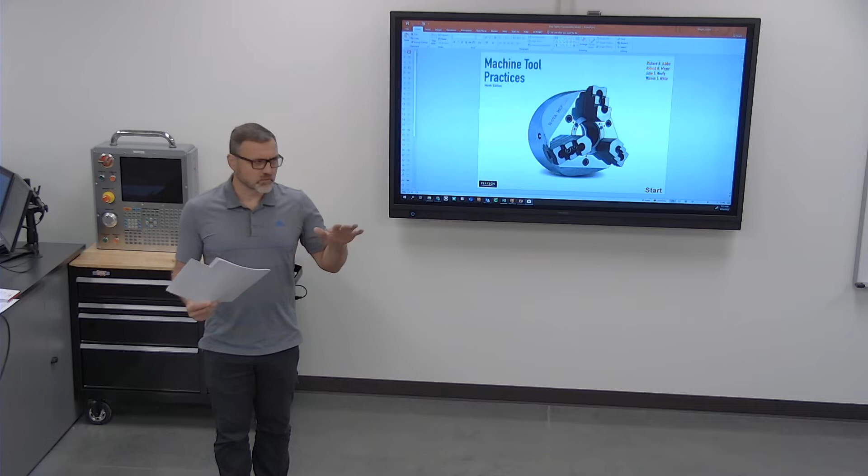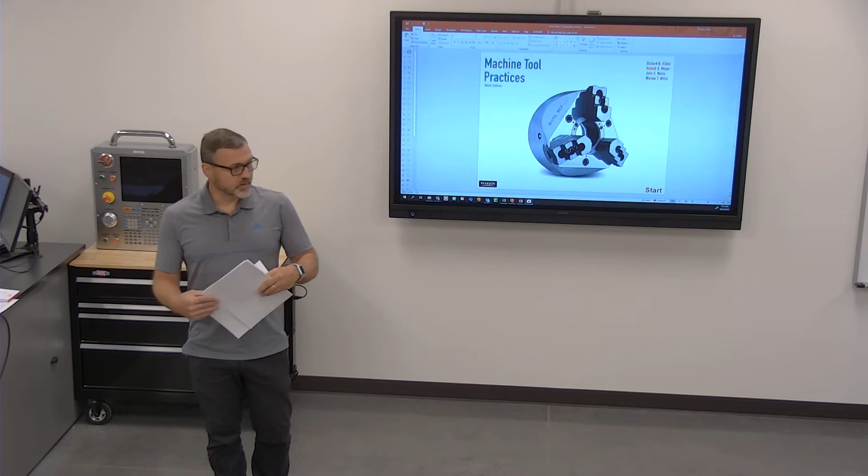We're going to do some safety stuff this morning. This is real general safety stuff. In your modules, your first module, you'll probably see them changing this week as we're doing some tweaking. 101s and 102s look pretty good. 103s and 104s need a little bit of work on them.

So I'm going to set them out here, and before you all walk out to the shop today, we'll go to the shop and start looking at material. Am I the only 103? I don't know. Am I the only 102? I don't know. You guys are.

Who's 102? Yeah, I'm looking at you, Brent. Oh no, you're 101. No, I just realized you say that to every single question. Anything anybody asks, you go 'I don't know.' I could ask, 'what's your name?' and you'd say 'I'm not really sure.' That's not a great life method. At some point that's going to be a problem, like when a cop walks up and asks if you're drunk, and you say 'I don't know.' They'll say great, let's go, get in the car, let's find out.

So 'I don't know' is not always the best answer. Isn't that their job to figure out, though? No, if you just admit to it, you're doing their job for them. I'm in 101. Well, I think everyone else knew that. Yeah, I don't think that was any kind of mystery to anybody.

So I've kind of laid them out, I think 1, 2, 3, and 4 across here. I just made one copy of everything, just one copy of each. So we'll go to the copier and make copies of them. I didn't want to print 10 copies of each one for you.

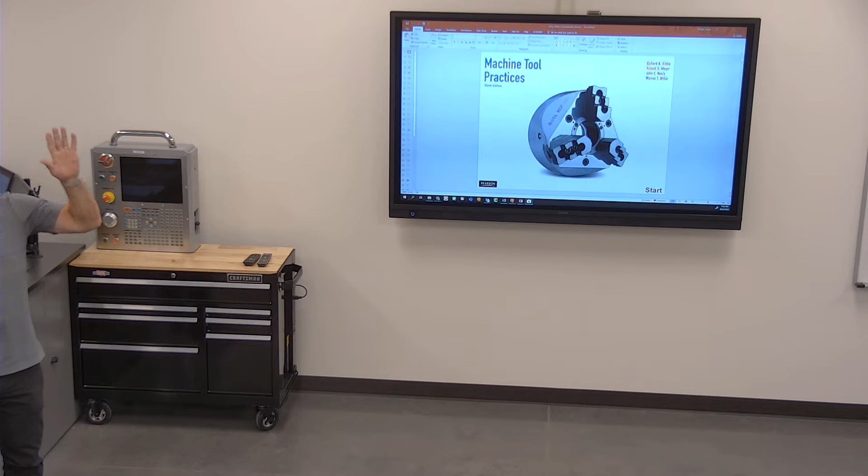Anybody still need a binder? I feel like I said yesterday, hey, after you're done in class, walk down to Fielding. There are 2 giant boxes full of binders. Anybody? I know you don't remember.

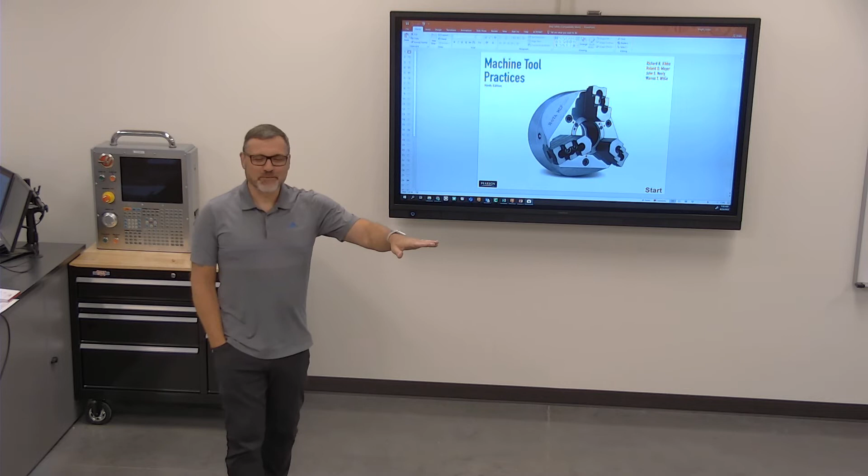I'm going to roll with that one for a while. Okay, who needs a binder? Yes, binder. Why'd you got one? Okay, binder, yeah that's right, you got one. You need a binder. Okay, you need a binder.

Okay, I want you two to walk down to the 3rd classroom. I went ahead and anticipated y'all, so I walked down to Fielding myself and got the 2 boxes of binders. Go get the most ugly, pink, flowery binder that you can. Don't come back with a white one or a black one. This thing needs to have flowers or Smurfs on it. I don't even know what a Smurf is.

So okay, everybody else has a binder. Yep, look at you go. You're going to print your prints out today. We'll go to the copy machine, print the prints out, and 3-hole punch them so you've got them. If you want to make 2 copies, totally fine. Like I said, this isn't all the prints, but these are the prints we need to get started.

So other than that, we'll start going through some safety stuff. We are videoing today. I will have a safety test, a general knowledge safety test for you by the end of the day, by the end of like 5 o'clock today. I'll have that for you in Canvas. First module, it'll say something like safety test or general safety. It'll be the slides that we went over today and then the safety test.

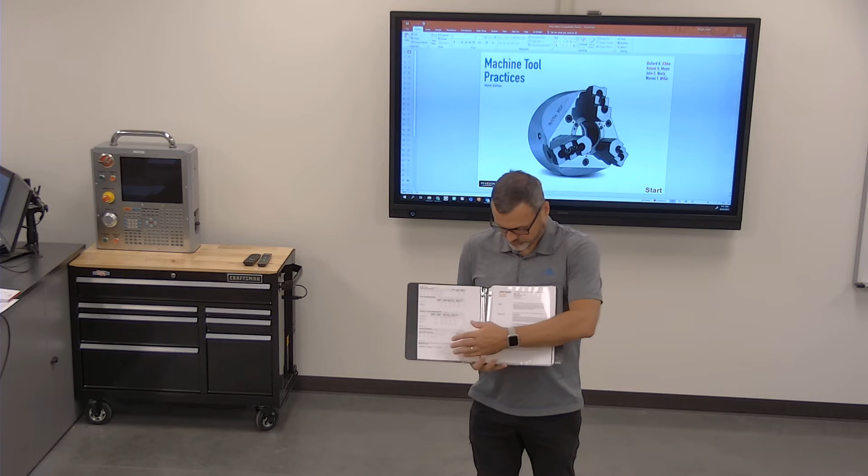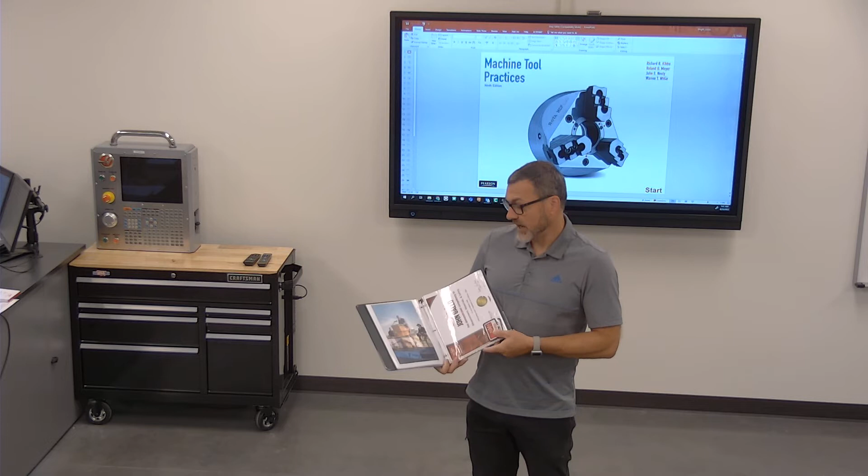John is the model citizen here, check it out. Unofficial transcript, resume - it's like he listened to everything I said. Certifications, that's a great picture. John at the groundbreaking, yeah groundbreaking. NIMS certifications, and then what they are behind them.

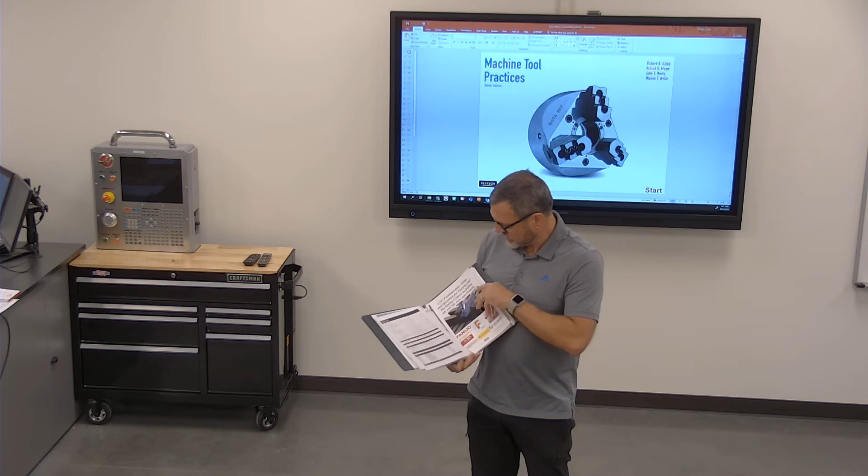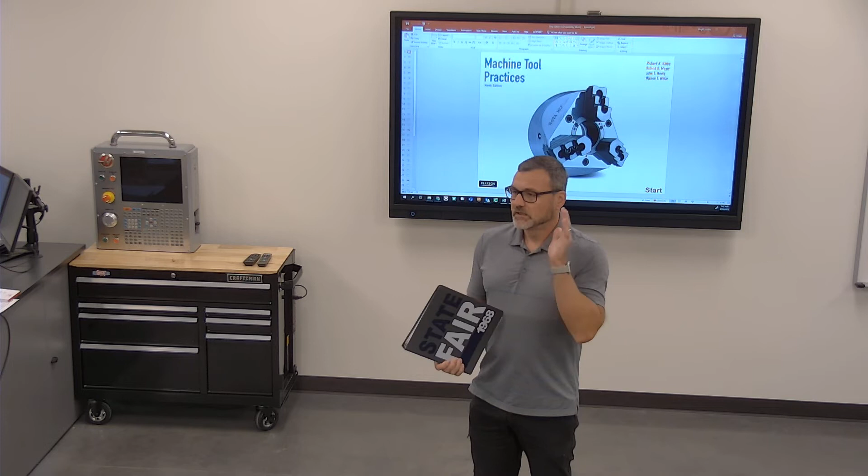NC3 certifications, and then his book and information stuff - things that he needs, things that are vital. Part prints, information, notes. See how prepared that is, so that when you go out to the shop, you're like, hey, we're going to work on part 7943862.

And he just pulls up that print, good to go. Awesome. And then if you need a print, and if you need some of those little envelope things, those little clear things, I think I have some of those. You're welcome to use those if you want to.

Let me make sure that I have them, I don't have them here, I have some somewhere. If you need to 3-hole punch them now, that's totally fine to do, and then we'll get the other stuff done as we go. That's great, and not all that stuff has to be done today, but it's something that you want to start thinking about - how do I get this stuff in here so that it looks good?

Today we will be out in the shop. We're at least going to start getting some stuff sawed, ready to saw. We'll go through some saw safety and some things like that. So let's go and start going through some safety things.

Yeah, that's awesome. So what they're gonna want is a handful of us to go over there, and they want us to evaluate their toolboxes. It's a great opportunity to go over there - we've got their toolboxes over here, and he said, man, I'd love a little bit of student feedback. So they're gonna have some boxes set up, I think. Hey, I love the way the drawer works, I hate the way it locks, whatever - don't be afraid to give them pros and cons on stuff like that.

So if you're interested in that before you leave today, we'll go over there between 9 and 10. We'll probably let class out early that day. If you don't go, then I can't be in 2 places, and I need to go over there with them. I need about a half dozen of you guys, and then we'll go through, do some evaluations on toolboxes, and then I think they'll do a quick tour with you guys through there.

Stanley Black & Decker is one of our apprenticeship partners. Not only are they a great donor to us, but they're an apprenticeship partner, which means if you get connected with them in the apprenticeship, like John is in an apprenticeship with MACH101. I was over there the other day.

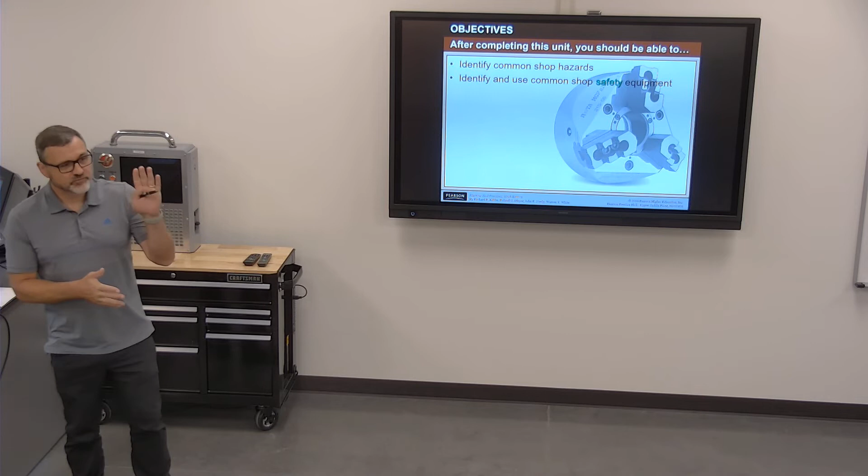So one of the things that can be a shop hazard is a lot of the chemicals and stuff that we have out in the shop. Does anybody know how you find out what is a dangerous chemical or not, or maybe something you're allergic to? Hunter, you might be allergic to bronze. Material safety data sheet, yeah.

So it's actually not called a material safety data sheet, or MSDS, like it was always called before. It's now just called an SDS, safety data sheet. It was a material safety data sheet for a really long time.

We have a flammables cabinet on the back side of the horizontal mill, you can't see it from here. On the front of it there's a book, and if it's a chemical or material that has anything potentially hazardous to you, it's in that book. So if you're deathly allergic to WD-40, we have all the ingredients of WD-40 in there, so you could figure out why you're getting sick. Anyways, all that stuff is listed.

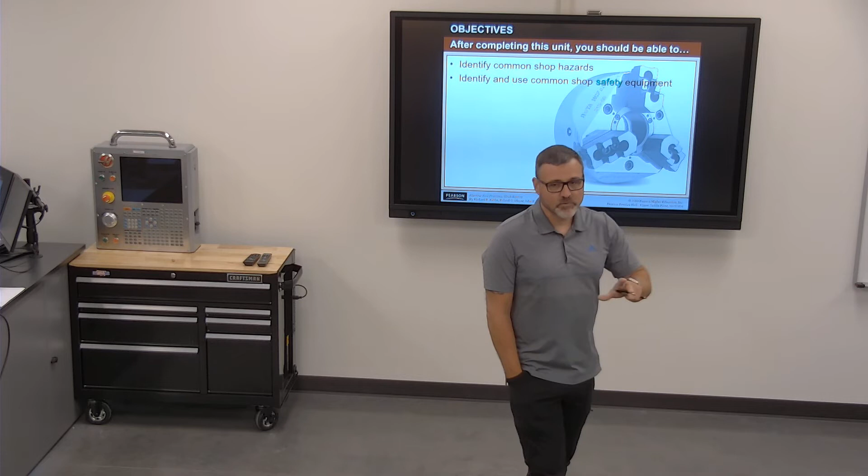If you have a problem, occasionally we'll see somebody get some skin irritation from coolant. Oftentimes that's not actually because of the coolant itself. Typically it happens because the coolant starts to get bad and builds up bacteria, and that bacteria gets on your skin, and that's actually the thing that causes the problems.

We have a couple of new coolant cleaners this year. One is on the mill you see the backside of when you come into the shop, kind of catty-corner from my office. It's got a big tank on the back with a green foam mesh piece. It's a portable coolant cleaner, so you take it off, move it from machine to machine, put the hoses in, and it'll clean your coolant for you while you're running that day.

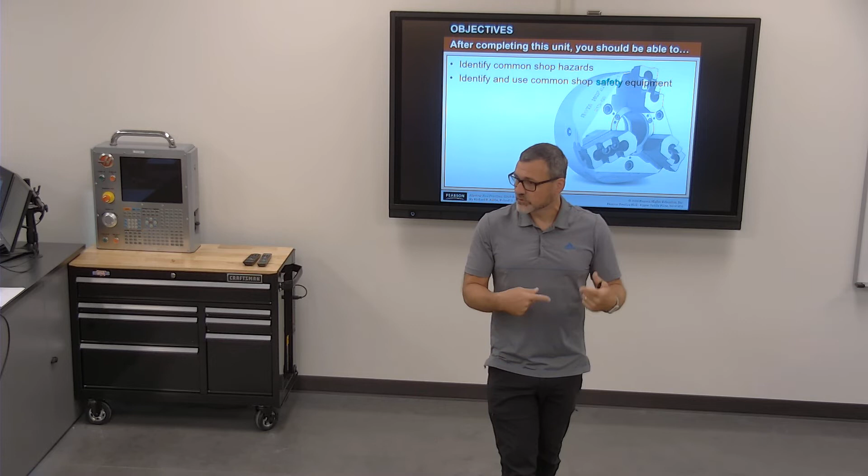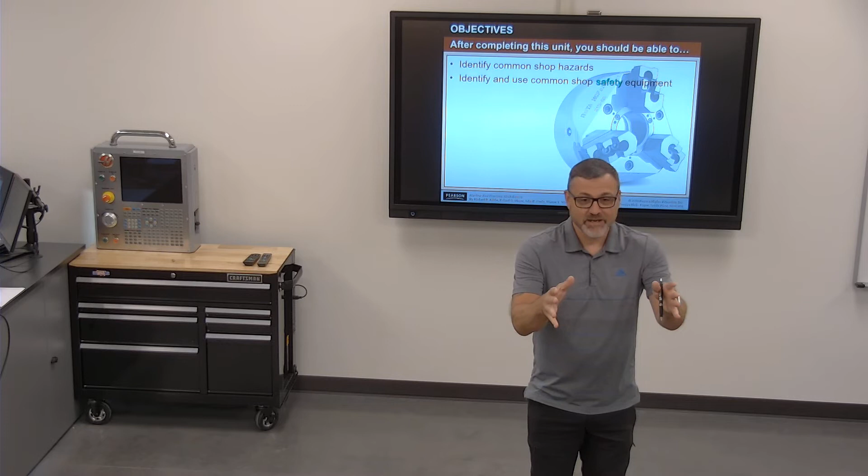A couple things to watch out for: it's magnetized to the back of the machine, and those magnets are insanely strong. Chance, you're going to have to be hanging off the machine to get it off. It's like a black plate - it was like a cartoon when I went to put it up there. I got about four inches from the machine and it pulled it out of my hand and snapped up to the wall. I was like, is there a switch on it? I don't think I can get this thing back off - I'm going to have to buy another one because it's really on there.

It has a clear translucent tank, so before you move it, drain the tank, then you just pick it up. We'll put it on a cart and move it over to the next station. I'm going to have a laminated piece of paper with a magnet or sticky on it that says, clean the coolant of this machine today.

So when we start going out to the CNC machines, whenever I give you one to work on, you might end up on machine 3, and machine 3 might have a sticker that day saying you need to clean the coolant in this machine. On our manual machines it's not so much an issue - we still use coolant from time to time, but it would be coolant straight out of a tank, so it wouldn't be as much of a problem.

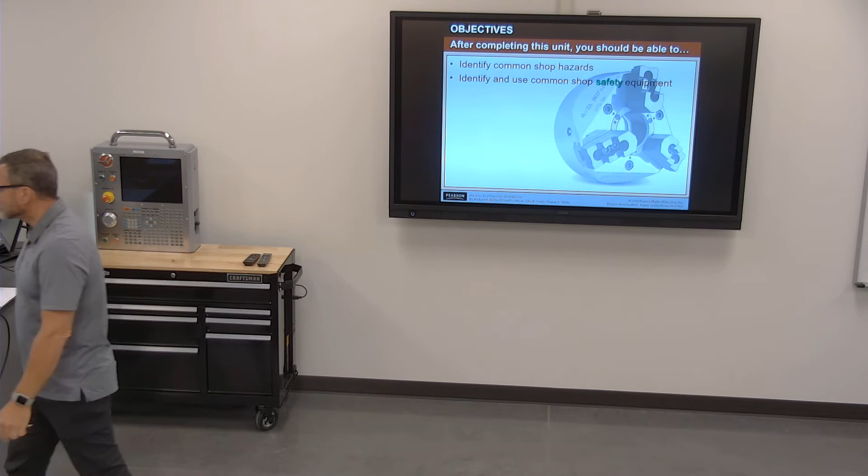So, SDS and MSDS are things you need to know about as far as the chemical world.

Safety is not often thought about. Most of the time people don't think about safety things until after they've cut themselves or hurt themselves. You have gloves in your toolboxes this year. Use those in the appropriate places. You don't use those when your hands are close to a machine, okay?

So if you're on the bandsaw, the bench grinders, a mill, occasionally you'll see somebody do something really ridiculous, like they're drilling a hole on a mill or the lathe, and big stringers are coming off, and they're going to try and grab them out of there. That is ludicrous to do, you know. If you can just stop the machine, pull the quill up, take the stuff out of the way, and then restart it back up, okay?

Same thing, gloves are good to use when you're putting a bandsaw blade on the bandsaw. Those are the appropriate times to use stuff like that, not when those other things are going on. You have a chip brush too, absolutely, there's a chip brush in your box. Believe it or not, this is beneficial, but it could also be a safety concern as well.

Over on the manual side now we have air that comes down, so it is sweet, but it brings in a potential hazard as well. One of the reasons why we didn't have it in the other shop is because we didn't want people blowing chips on other people. Now we've got just 2 of them for each area, 2 on the mills and 2 on the lathes that come down from the ceiling. So put an air nozzle on it, you can blow off your stuff, just don't be ridiculous about it.

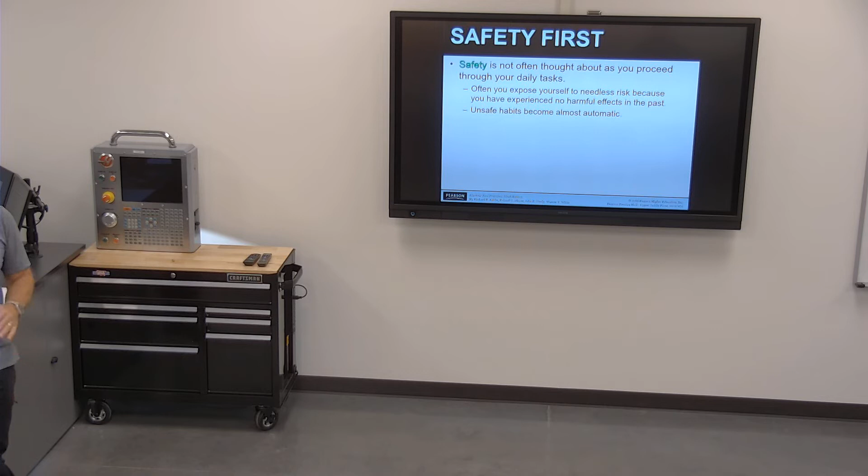So if you're standing at a mill, standing at a lathe, it's okay to use air. Take a look at your environment before you do anything. Don't just start blowing chips through the spindle tube, blowing it right onto Cole as he's standing there trying to get his other stuff going, or he just turned around and shoots right in his face. You don't want to do that to somebody, so make sure you're paying attention to your area. Bad habits usually end up showing themselves as problems later on.

Pull these all out. One of the things you want to think about as far as safety in a shop, it's safety for us as well. OSHA is obviously a big deal in shops. OSHA isn't a factor here. OSHA doesn't step foot on the grounds here, but they can definitely come into your shop. It's pretty uncommon for stuff like that to happen.

If you want to think about just the shop that you work at or wherever you work, the idea is that they're profitable. If you're cutting your finger and getting stitches and going to the hospital every month because of something, you're probably going to turn out to be not very profitable. And if everybody's doing that, then the company's not profitable. If you're not profitable, then you're probably not staying there very long. And if the company's not profitable overall, then they're not going to be there very long, and you basically wasted your time in the job.

So one of the things you want to make sure is that you're doing the best that you can to take care of yourself. You definitely want to be able to count to 10 until the day you die, right? So you want to make sure that those things are there.

I have seen some really crazy stuff. I saw a guy drop probably a 6-inch round piece of steel directly on his foot, not wearing steel toes. We didn't require steel toes in our shop, we said leather boots, they could be closed-toed. So like these are not steel toe, and that would have been appropriate at our shop. He was wearing boots, but they were not steel toe, and crushed his toes.

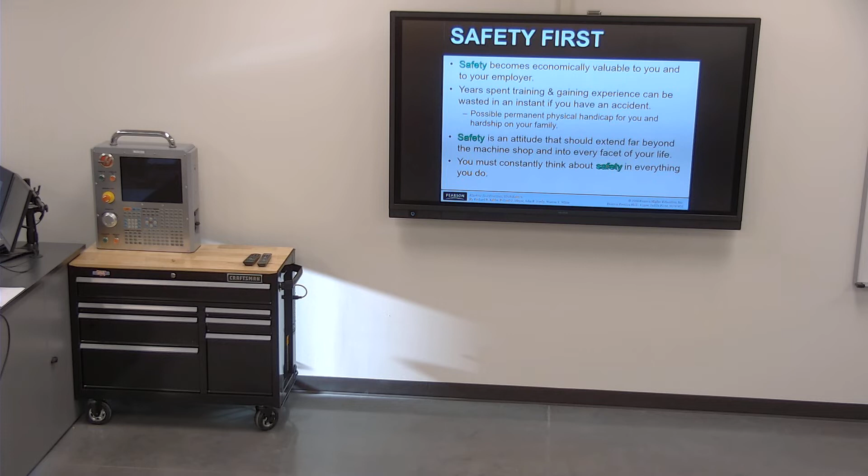All right, talking about dust collection.

So we have, out on all of the grinders, that includes surface grinder and bench grinders, dust collection. We have not been good about using it in the past. We have to use this from now on.

So we have a totally new grinder setup. Matt's putting together all the new ductwork for it right now. So you'll need to, before you run a bench grinder or surface grinder, flip that dust collector on first. It's a little jet box.

If it seems to not be functioning right, it's got filters in it, and believe it or not, those filters need to be changed every once in a while or cleaned out. So if it stops working, don't be like, dude, the next guy's gonna have to clean this out. Just take a second, stop, clean it out. Takes you 5 minutes to do it. Dump it, put it back in, you're good to go.

It's gonna cut down on all the dust. You do not want to be inhaling that stuff. Because what you do today doesn't necessarily have an effect on you today, but when you're 40, 50, it's definitely gonna have some effect on you. So you want to make sure you're paying attention to those things.

Same thing with gloves, just getting too close to something. If you're wearing lanyards like you have on today, you're not gonna be able to wear those out in the shop like that. I love those lanyards, but they also bring in potential hazards, whether you're on the grinder, the lathe, the mill, whatever. You want to make sure you're not leaning in and having that thing come out, so it needs to be stuck down in your shirt.

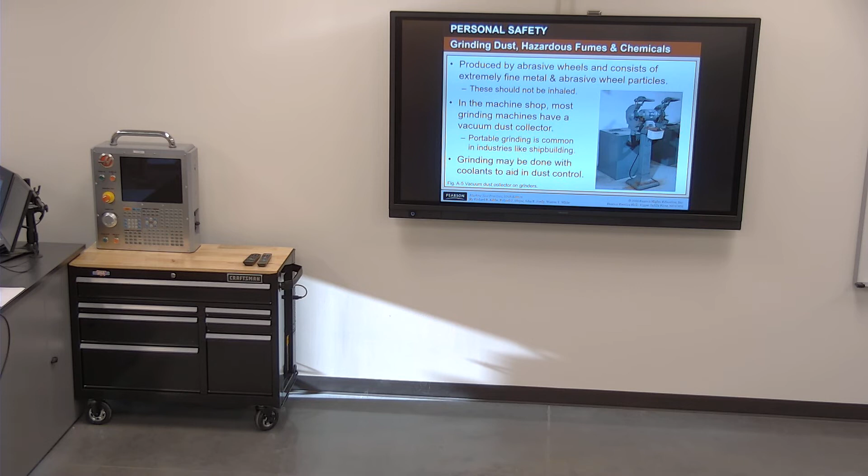I knew that would be an issue for you, that's why I brought it up. In here with earrings? I think I'm the only one in here with earrings. I have had holes in my ears, but other than the factory ones, I have not worn earrings for probably 30 years, so I'm probably not a candidate. Am I the oldest one in here too? I don't know, you'd have to poll the group as far as age.

How old are you? Thirty-four. Yeah, I mean, other than me, I'm thirty-five. I'm just kidding, I'm forty-seven.

All right, so general dust collection, just be really cautious on what it is you do, as far as the grinder, even like a 4-inch grinder, just be really cautious of those things. Some of this won't really be applicable to us, but it's still good information.

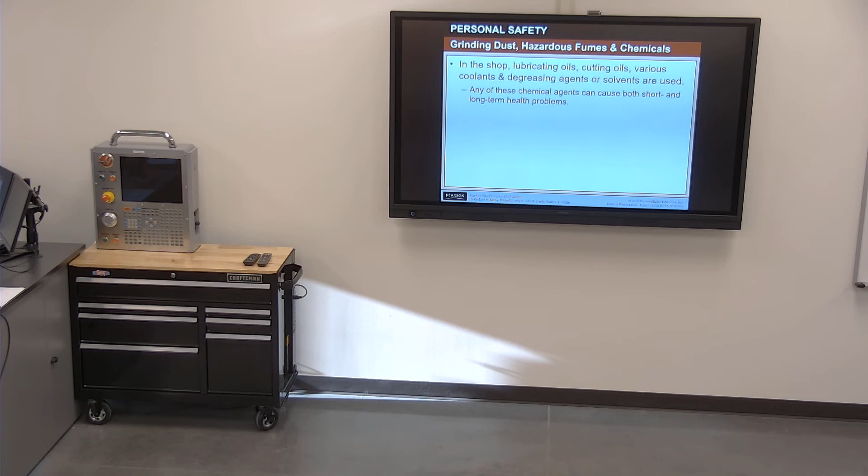Same thing with any type of oils we use. I see this happen all the time, and I tell students all the time, just going to the flammables cabinet, grabbing an oil out of there and using it on the machine to lubricate the surface. Maybe you're cutting threads and you want to keep it from chattering or getting too hot, so you go put some oil on it.

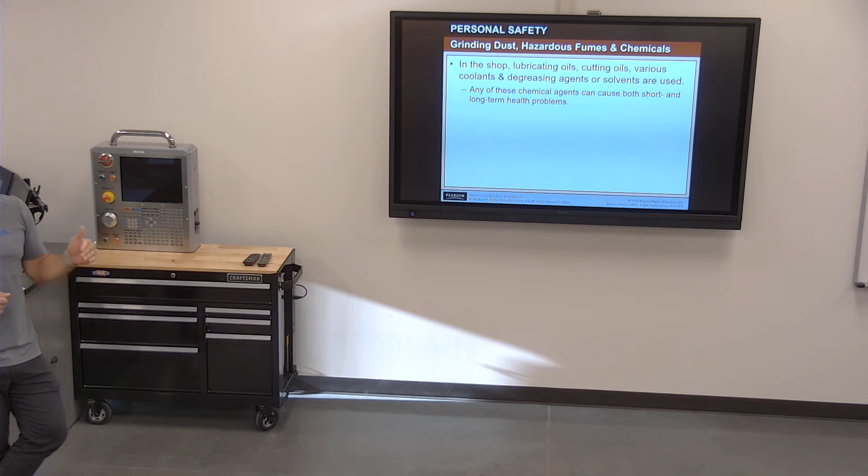Most of those oils are lubrication oils, not cutting oils, okay? So when you're cutting threads and it's taking big cuts, it tends to get hot, has potential to chatter and cause problems. Maybe you're tapping or cutting with a die, and if you use something like WD-40 or one of the oils in the squirt cans, oftentimes those are lubrication oils, not cutting oils. So think about what a lubrication oil is doing. It's trying to create a layer of oil between the cutting tool and the material.

Cutting oil has sulfur in it that does something different. It activates the cutting rather than trying to stop it. So spraying WD-40 or 10W-30 oil on your threading tool as it's cutting isn't making the cut better, it's making it worse. You really need to use the Cool Tool bottle with Cool Tool in it, okay? That's what it's for.

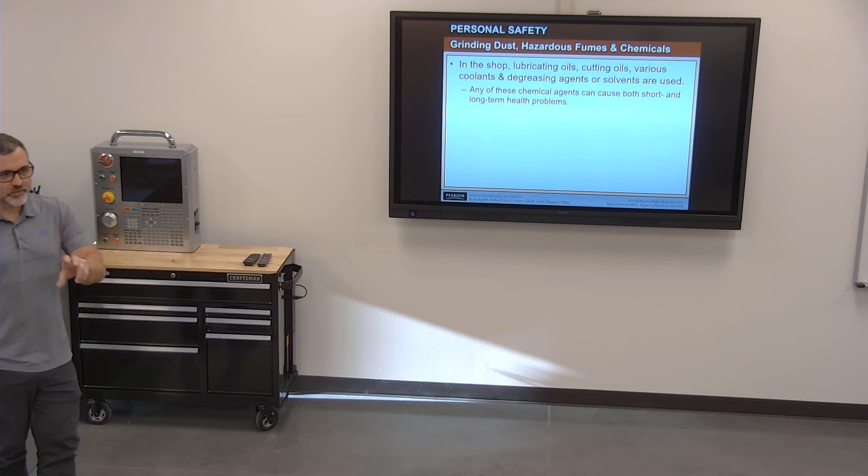So if you go over there and it's empty, definitely don't do anything, you just put it back, grab another one, empty again, still don't say anything, you just keep going through. Then finally you get to that jug that's probably motor oil, but you're like, all I need to do is my thing. You run the potential, if you don't know what's inside there, that thing could be full of gasoline in today's environment. You have no clue, right? And if you just start ripping it out and pouring, who knows?

You just don't know, right? You don't want to go over there, I mean it would take some pretty intense heat to create a fire, but it's potential. No one wants to go, 'I was in the machining program,' and they say, 'you're not anymore? Well actually, I burned the building down. It was brand new, we were the first group of students, I burned it down.' 'How did that happen?' 'Well, I grabbed some cutting oil, but it turned out to be gasoline.'

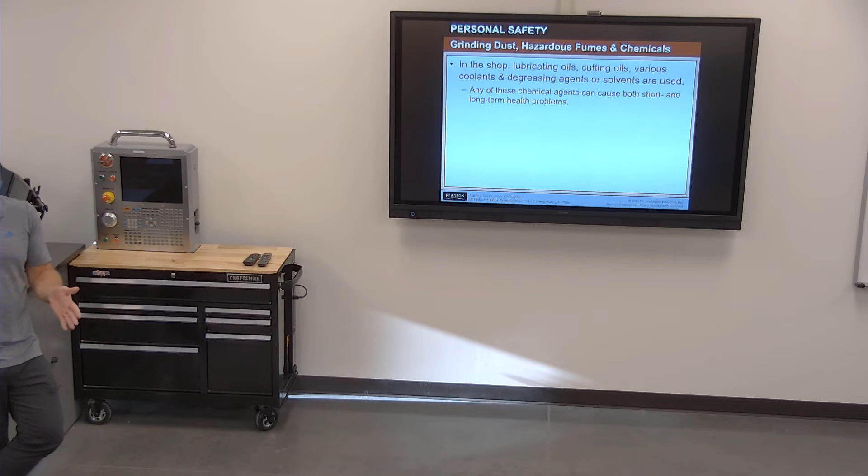My question would be, why would gasoline be in here? But then they'd say, didn't you check? Well, I was in a hurry because I just wanted to get my part done. How many times have you seen a problem or something wrong and thought, all I need to do is get my thing done, this can burn to the ground after I'm done, I don't care, this machine can fall apart.

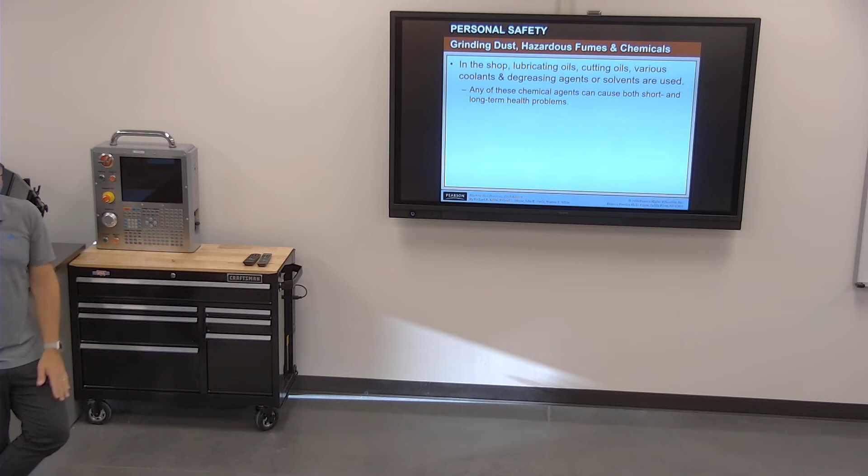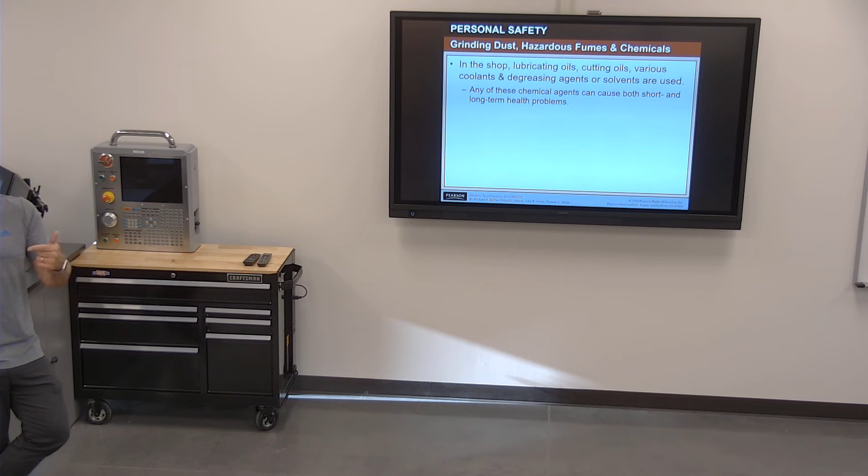Here's what's funny, I've watched you guys do that before and nothing happens. You come back the next day to the same machine and you still have the same problem, and you're like, dang. Because the goal was to come in earlier, go to a different machine, and let somebody else deal with that problem, but you got in here later and ended up in the exact same spot, and you're like, dang, that sucks.

So anyways, you want to make sure you're paying attention to the stuff right in front of you, make sure you know what those chemicals are, and make sure you're aware of the fumes they create. I love the smell of Dykem, it smells good, man, but you don't want to inhale that stuff, right? You don't want to be that guy.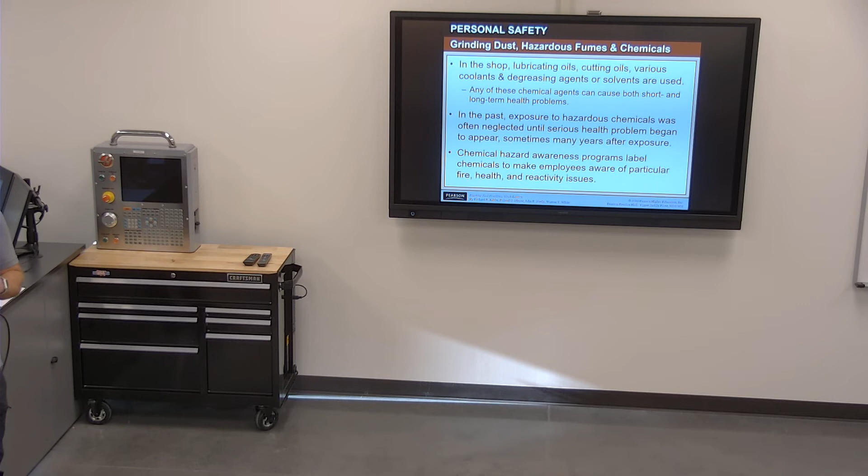When I was in middle school, 7th grade, this is back in the 1990s, they had this kid, and he would take spray paint and spray it into a bag.

This is industrial arts, back when they still had industrial arts. So this guy would huff spray paint, and one day he's fully passed out in the lab area with yellow paint all over his face. This is back in the day where we would not have moved him today, right? They just picked him up and dragged his passed-out body into the office, and he woke up in the principal's office. They said, 'What are you doing?' He said, 'I don't know, I must have passed out.' They asked, 'Were you huffing spray paint?' He said, 'No,' but he was just covered in yellow. Seriously, these things have fumes that are very dangerous, man.

Now we have great ventilation. We actually have ventilation systems on either side of the shop. If you have a problem, if you see fumes building up or smell something, if you're having any kind of issue like that, come grab one of the instructors. We'll just turn that on and get all that stuff out of there, because maybe we haven't noticed, maybe we're in class or on another part of the shop. That's what those things are built for, so we can get anything out of there.

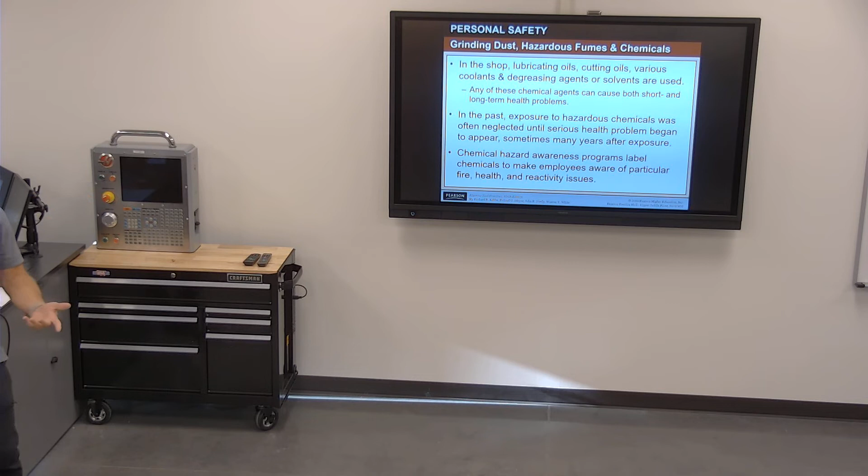Honestly, when the CNCs are really kicking, if they don't have smoke eaters on them, they will start to build up some fumes in there, and most of it's steam driven because of the heat. So you want to make sure we don't breathe that stuff in. There's literally a device to get that out of here. You don't want to endure that when you don't have to.

It's like walking around with a wasp in your shoe. Yeah, that happened too, I did have that happen. But no one would leave the wasp in their shoe, right? No one goes, man, I got a wasp in my shoe, and just leaves. They're like, I got a wasp in my shoe, and they kick the shoe off, right?

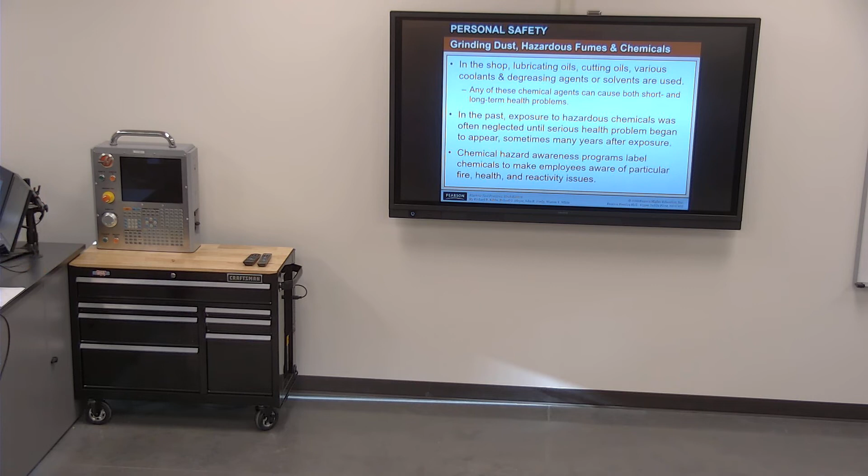So yeah, I mean, you just want to make sure you take care of the things as they come up.

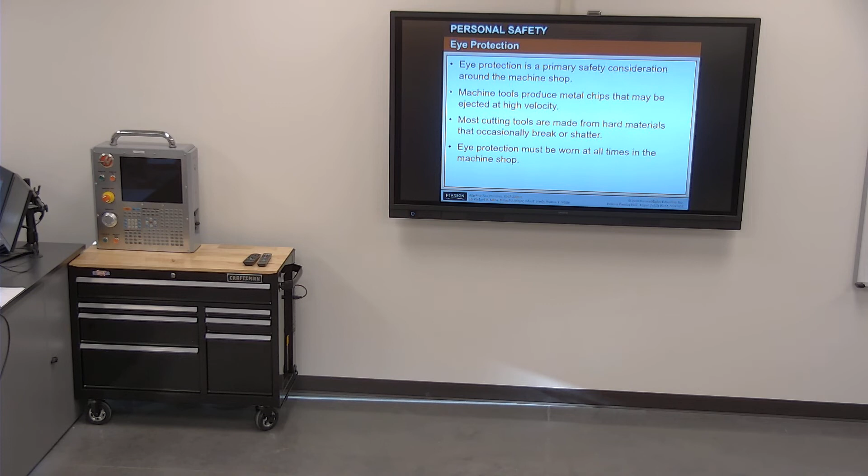All right, we talked about SDS, and here it still says MSDS. MSDS is definitely a thing we've heard about for so long. We've talked about eye protection. No kidding, all day long in the shop, eye protection must be worn. There's really just no gray area on that. We already talked about side shields. There's several different variations of ways to keep your eyes safe.

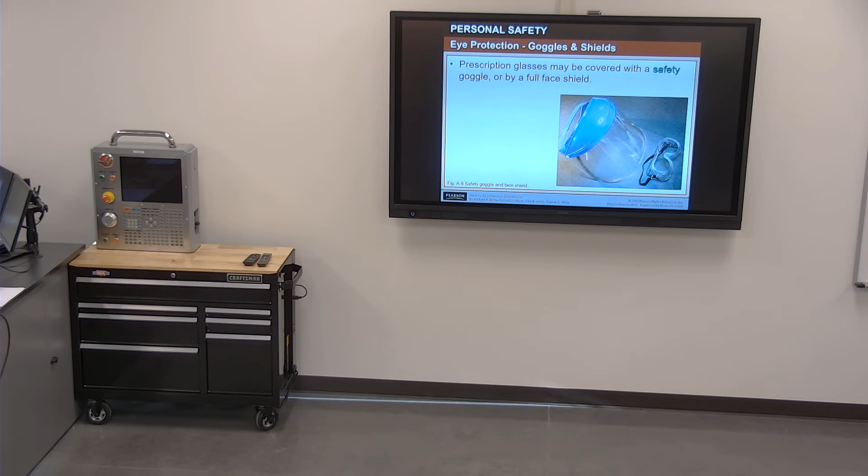If you're like, 'Dude, I need a face shield because I know me and I'm just crazy out of control,' then that's cool, do that. I'm not buying one for you, but if you want to bring one in, that's totally fine. I don't buy your safety glasses for you. If you want science class goggles, that's cool too, but they'll probably start to steam and fog up on you. If that's the look you're going for, walking out of here with the ring around your face, that's cool, I don't care, as long as they are Z87 safety glasses with some side shield protection on there. I don't care how you do it after that, as long as they're good to go. Don't bring in your grandpa's vintage safety glasses from the 1940s -- those are not going to be okay.

We talked about closed-toed shoes. Steel toes are preferable, so I'll go back and forth on steel toes or no steel toes, just depends on what I'm wearing. They're not required in here, but a lot of people wear composite toes now. Anybody have composite toes? You do? You like them better? They're a lot lighter -- steel toes get pretty heavy, you know.

When steel toes get dinged up enough, the metal starts to get exposed on the end. We always left our boots at the shop, taking them off and switching into shoes as we left. The bad thing about that is people would weld the toes of your boots together. Then you come in the next day and you're like, dang it, and you'd have to saw them apart and grind it back down -- probably not good for them, you know. It's hilarious.

So what would happen to us is they would take people's steel toe boots up to the beams in the ceiling of the building, and they would tack them up to the top there.

I have a friend who worked at Eskridge in the Kansas City area, and if you left your boots there and they didn't like you, they'd fill them up with grease. So you'd stick your foot in there and it'd be like 2 inches of grease, and that ruins the boot. You don't get that out, you just throw a fit and punch someone in the face in a safe way.

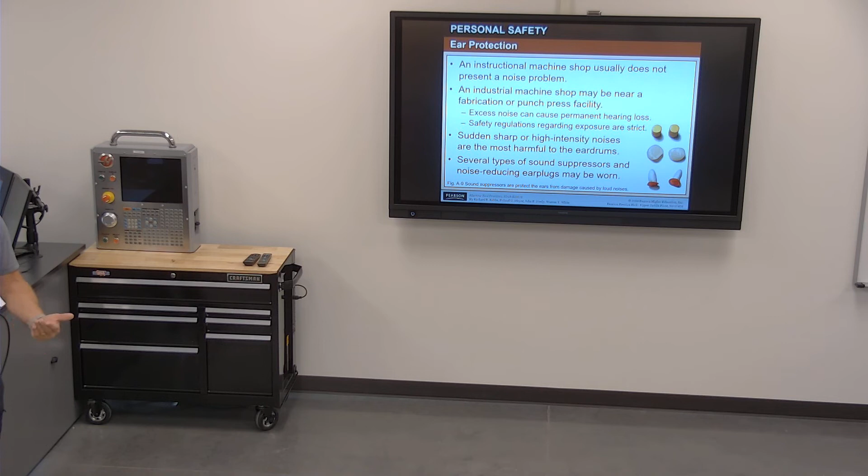Absolutely, that's what I want you to be taking, big cuts. Fast metal removal is what we're trying to get done. We're not trying to make baby cuts across this thing and spend all day wearing it down. Proper work holding is paramount in those things. But when you're fly cutting, I want you to take at least 1/8 of an inch as you're ripping across there. So when we get to those times, I'm going to try to get you to take bigger cuts and do bigger things.

And it does start to build up some sound. When everything's kicking in, morning classes might be in here doing this, CNC classes might be over there doing that, and our high school classes might be over there doing their thing. So you could get 30 people in here at one time, and it will start to get loud.

So we've got earplugs as soon as you go out this door, and then you hit that first sink, there is a box of ear protection there. If you want to just grab a handful, a reasonable handful, and put it in your toolbox, it's totally fine with me. You can just have them there and use them as much as you want. Earplugs are meant to be wadded up and then put down in that canal—they just should not touch your brain, okay? But they should be in far enough that they can do the thing that they need to do.

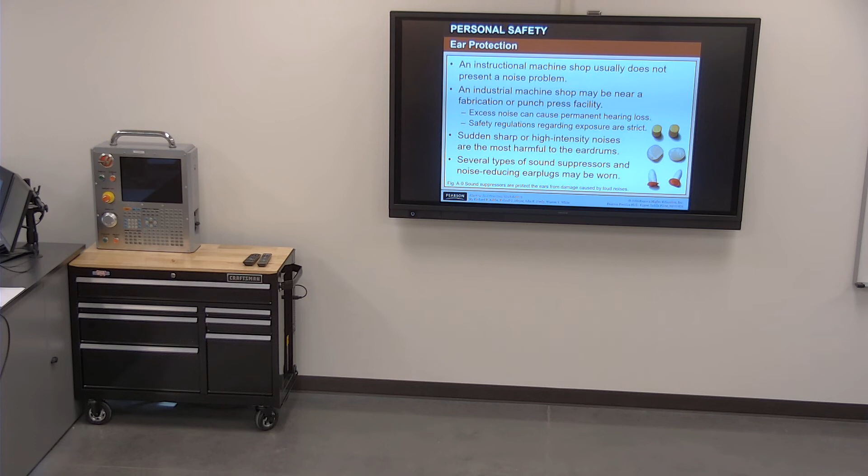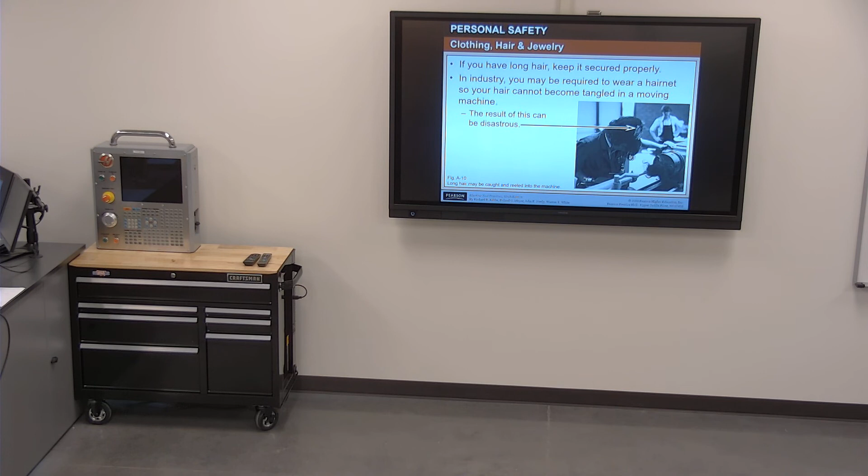So now the shop you work at probably has disconnected the safety switches. We will not do that. Okay, that's never going to happen here.

Same thing goes with jewelry, and we've already touched on strings and stuff. But if you wear a long necklace or something like that, you need to keep all those things out of the way. I mean, if it comes off of your body by 2 inches, that's probably the end of it.

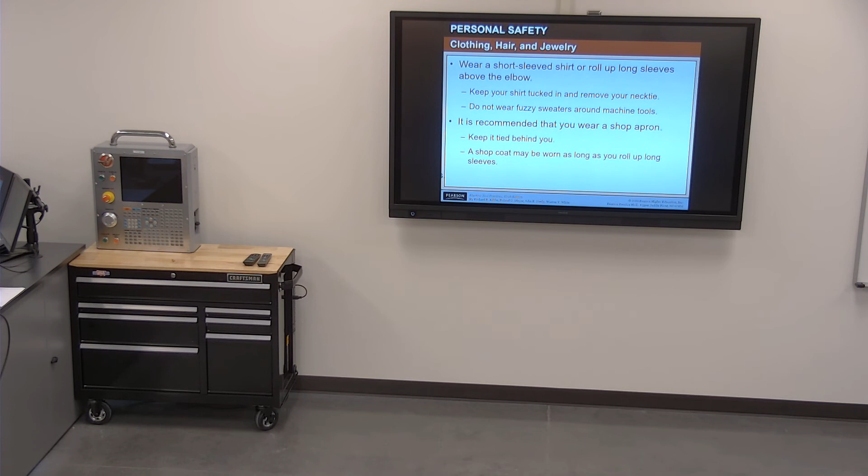All right, so we talked about gloves and chip brushes. Use the chip brush.

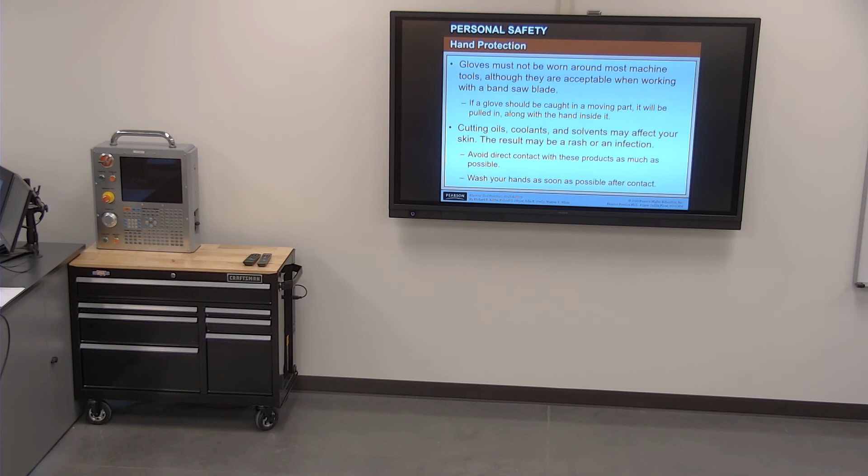Don't try to be a Superman. Lift with your legs.

Hey. Do you need me? What do you need me for? Okay. I might be back, but not right now. All right, that'll work. Thank you. Yep.

Okay, lift with your what? Legs.

If it has any kind of weight to it at all, we've got pallet jacks, we've got fork trucks, we've got other people. There's really absolutely no reason for you to show off. Isn't there a crane over there too? Not a crane in here—there's one over in welding, but there's just no reason. Most of the stuff that we do is not heavy enough that it's going to be an issue anyway.

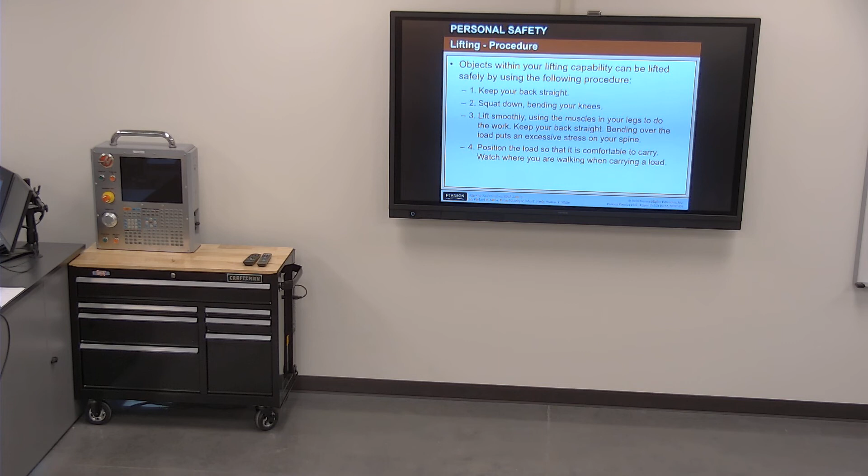So probably the biggest thing we are going to be dealing with is when material comes in 12-foot bars, and we're cutting it up into shorter, manageable pieces at that point. So yeah, don't even mess around with that.

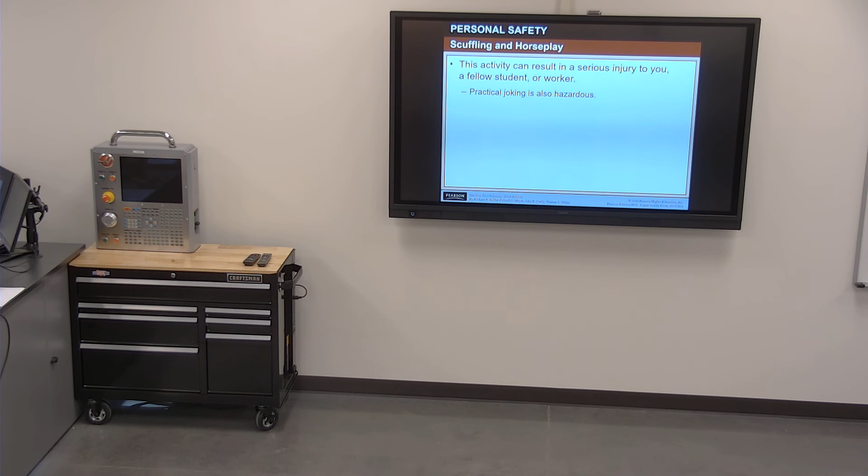Horseplay—I am all for having a good time in the shop, but not at the point of somebody else getting hurt, not at the point of even distracting other people. We want to make sure that those things never happen.

When I was young and had just really started doing some stuff, I was working on a pretty expensive rotor for Gardner Denver one day. I wrote this program and was walking through the parts on it, but I wasn't paying attention. It had a tool change in it, and I didn't change the tools because I was talking to somebody. I just hit cycle start again, and I just plowed this rotor apart, and the owner comes over and is like, 'What happened?'

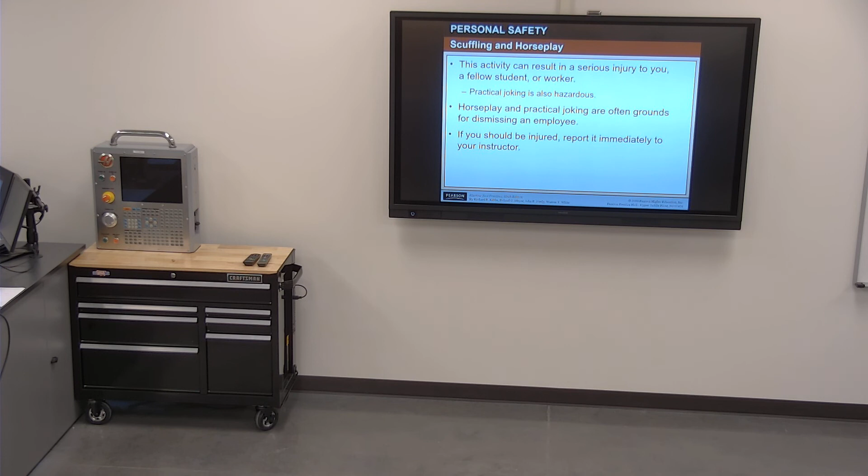I was talking to somebody and I was not paying attention. He's like, 'Well, that was like $3,000.' I don't think it was probably that much, but it doesn't matter. I scrapped it. It was his, he had to pay for it. It just sucked. So nothing wrong with talking and having a conversation with somebody besides you, but it shouldn't be something that distracts them or causes any type of problems along the way.

Compressed air, since we have compressed air, we want to make sure that we're paying attention to that. Use the chip brushes. Don't blow things across the room. Please don't make air gun driven blowguns that shoot plastic bullets across the shop.

We have a lot of glass in this place, and I don't ever want to have to go to management and be like, 'Hey, those awesome great windows that we have out front? I need one replaced.' And they're going to go, 'Why?' And I'm going to be like, 'Because of this plastic bullet that somebody machined.'

I have one of those that I made for myself a long time ago out of conduit. Don't make one. But it's super fun, just not super fun for here. It's super fun to do somewhere else in an appropriate environment. That environment is not here.

These burns came from when I was doing welding school. My buddy turned my welder all the way up and stuck that thing to the table, and next thing I know it's red hot and exploding. It's just not okay to do.

We built these air guns out of conduit, and we would take your air nozzle apart and screw it to the end of the conduit, make a little plastic plug, little MPT that came out the backside of it. And we made these little plastic bullets. Mine's got flames on it and stuff. And what would happen was we had these big trusses that went through the shop, these big metal trusses, and they would build up dust on them.

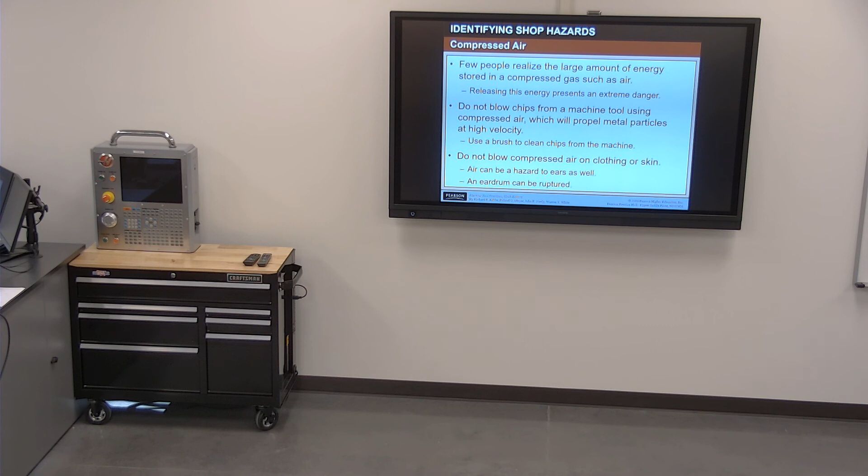This Blanchard grinder job was the entry level job, right? So it was where you figured out if the guy was going to stay or not, or come after you. And so we would just sit up there and shoot them all day long instead of working. So, not great decisions is what that was. So don't be like that.

All right, so housekeeping as far as cleaning up your areas. We used to have a can like this. This is a fireproof can, so if you put shop rags in there, it helps keep it suffocated so it can't catch fire. We don't have a can like that anymore.

We only use the disposable shop rags because they tear apart. If they were to get on a spinning piece, they shouldn't, that shouldn't happen. But they are pretty easy to take care of. They need to go in the trash all the time. I'm not your mom, I don't need to come by and clean your mess up after you get done working that day. So go straight to the trash with them.

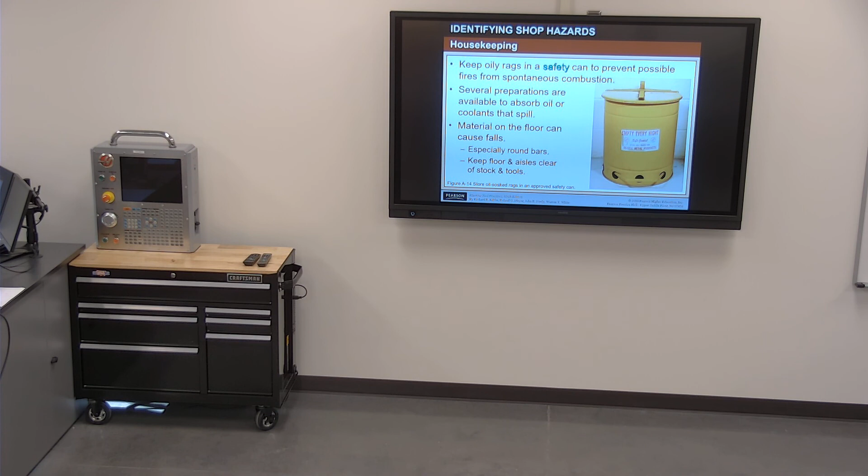I would say this too, with one of those blue shop rags, it's a multiple use kind of thing. If you use it to wipe your hands off and it's not really that dirty, just leave it there, and you can use it 3 or 4 times, and then when it gets really dirty, throw it away. I've got plenty more, so when you run out of that roll, just grab me and we'll get another roll, throw it in your box, and be good to go. You want to make sure that area is clean and everything's set up.

Fire extinguishers, there are fire extinguishers throughout the building. You want to make sure, I think all of ours are ABC fire extinguishers. If there is a problem, somebody needs to call 911, somebody needs to grab a fire extinguisher, start doing some stuff, okay?

So don't try to take care of it yourself, don't come looking for me. I mean, somebody should come look for me, right? But don't go, 'Dude, that's on fire, I'm gonna take a picture of it, and then I'm gonna go say something to Justin.' We need to act immediately on those types of things, okay?

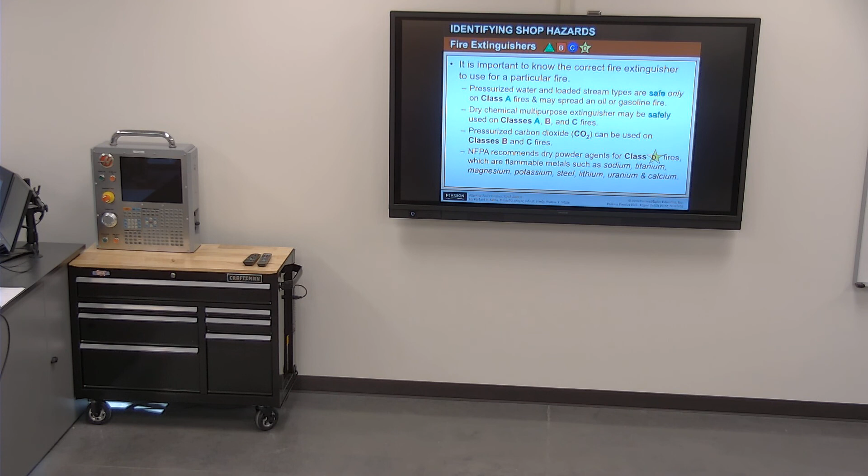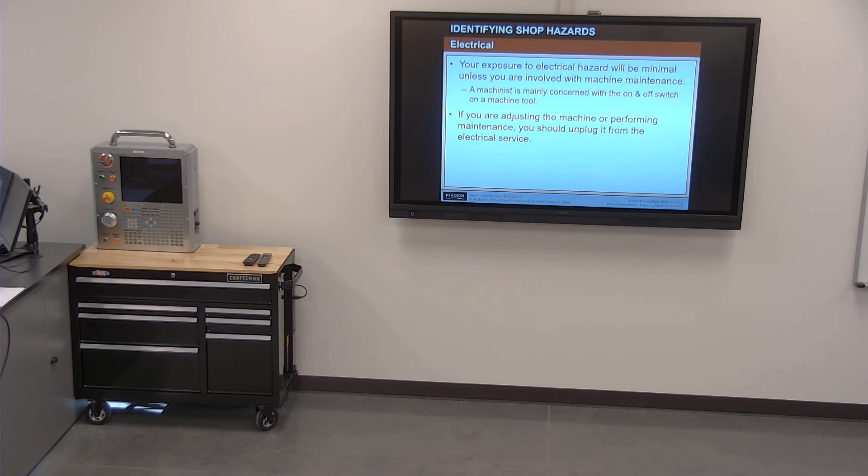So there's some information about what's the best thing to do for those fires. Electrical, if something is locked out, tagged out, then obviously you're not going to use it or be able to use it. If you see some type of an issue that's electrical, please say something so we can get it taken care of immediately. That shouldn't happen in this building, but I don't say that anything can't.

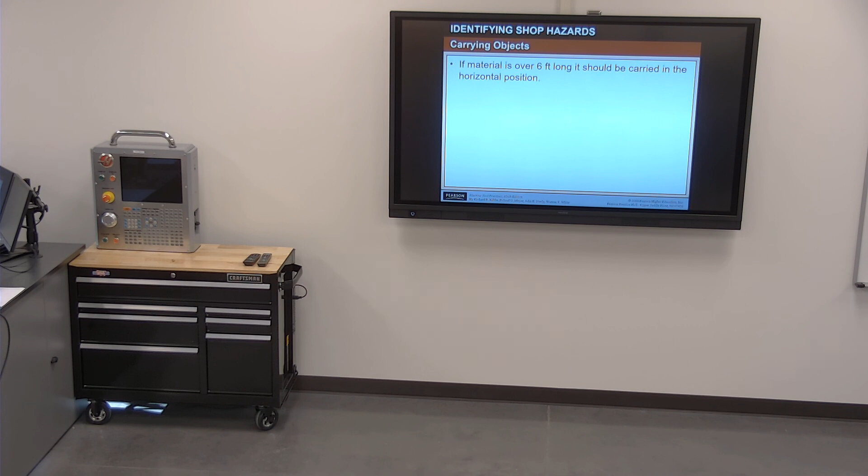And then a quick machine safety checklist. Some of these things we'll go through just real quickly as we're starting to look at the machine, and then we'll go through them more in depth as we go.

Do I know how to operate this machine? Don't walk up to one of the 5-axis mills, turn it on, fire it up and hit cycle start. Probably a bad move. Don't operate it unless you know how to use it.

Know what the potential hazards are, pinch points and stuff like that. Know that all the guards are in place. As far as I know, we do not have any guards removed from anything, and we would not intentionally remove any guards from anything.

Is the way that I'm going to do this safe? Am I doing something that I probably shouldn't do? Honestly, that could be a tattoo for y'all: am I doing something that I probably shouldn't do?

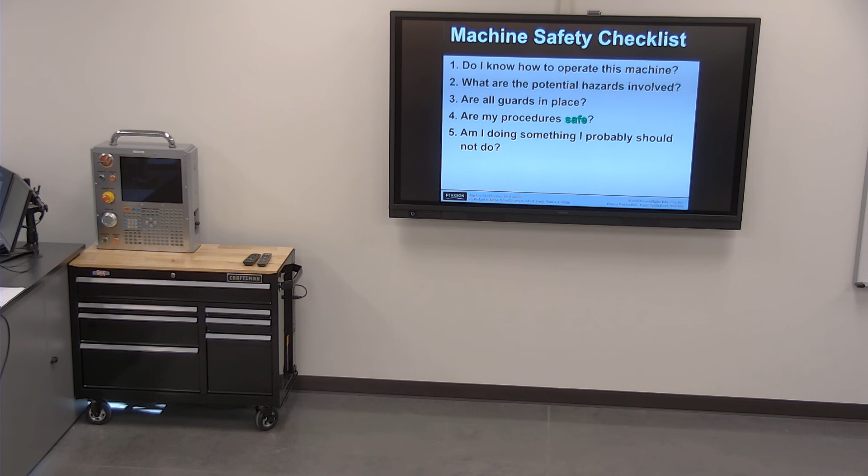Have I made all the right adjustments, locking bolts and clamps? I think that's even just general practice, not necessarily even safety, but along the way as you go. So if you're running the mill and you're fly cutting across something and you don't have the table locked down, there's nothing to say that that table won't start to veer away from you. There's a lot of vibrations and stuff, so make sure that you have the right axis locked.

Is your workpiece securely in place? Is it properly secured? You don't want a piece of material coming out. Do you have the proper safety equipment?

Do I know where the stop switch is? I'll just tell you, on our machines, anything that's red will stop the machine, whether it's a reset button, a stop button, or an e-stop button. So push those things when you're in doubt.

Do I think about safety in everything that I do? You should.

Here's just a little bit of information about OSHA. Like I said, OSHA doesn't really have a place in here, but we're trying to make sure that we're covering all of those things as we go so that they don't have to come in here. So violations, inspections, and penalties will happen more outside in industry, but we want to make sure those things are not problems. More information can be found at osha.gov.

So like I said, I'll have this as a slide show for you in case you're having a hard time sleeping tonight, so you can look through that and get it taken care of. I'll have a safety test set in there. It'll be a general safety test.

We will have a couple of extra safety tests as we go, specifically for machines. So you might be like, hey, I already took my safety test. Well, we'll have a mill one, bandsaw one, lathe one, separate ones as we go.

All right, so here's what I want you to do. I've got most of your prints, at least the first few, for you to get started with for all the sections that are in here today. So they go 101, 2, 3, and 4, I think is how they go. Feel free to double check in your course shells to make sure you're going to print out the right prints.

We can go up to the copy machine up there. If you want to send a representative, that's fine, or if everybody wants to go up there and print their own, if they need to. If you don't need to, then you don't have to. And so you can say, hey, how many 101s are in here? I'll let you guys make those decisions on how you do things.

And then from there on out, we'll review all of our stuff that we're working on, and then we'll go out to the shop and start doing some sawing. So, make your decisions on...